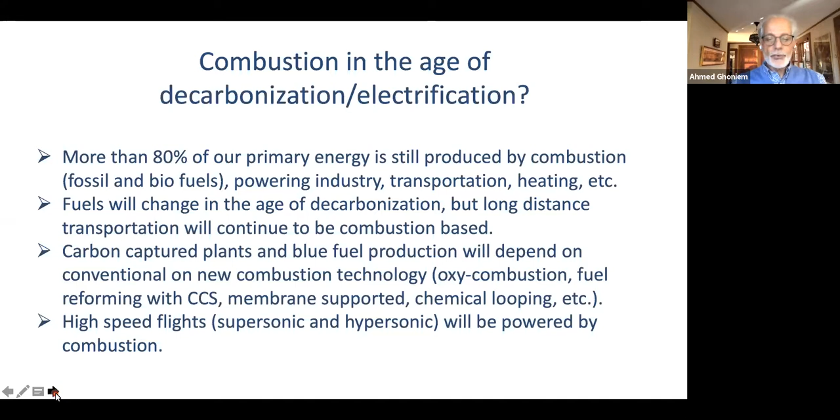For instance, long distance transportation is likely to continue to rely on fuels, probably biofuels, hydrogen, or other alternative fuels. It's very likely that carbon capture and storage, as it comes online, will continue to use some form of combustion processes, maybe oxy-combustion, maybe more traditional forms with post-combustion CO2 capture, so that will continue to require combustion technology in some form. And of course, any form of flight is very unlikely, especially long distance, to continue to be anything but combustion-based technology.

With regard to technology, combustion technology is very old, depending on where you start—fire, all the way to burning supercritical fuels, which is very recent. Obviously, it adopted and changed with time to address technologies, for instance, high efficiency, high exergy efficiency in particular for power systems or propulsion systems, and for reducing emissions, in particular NOx.

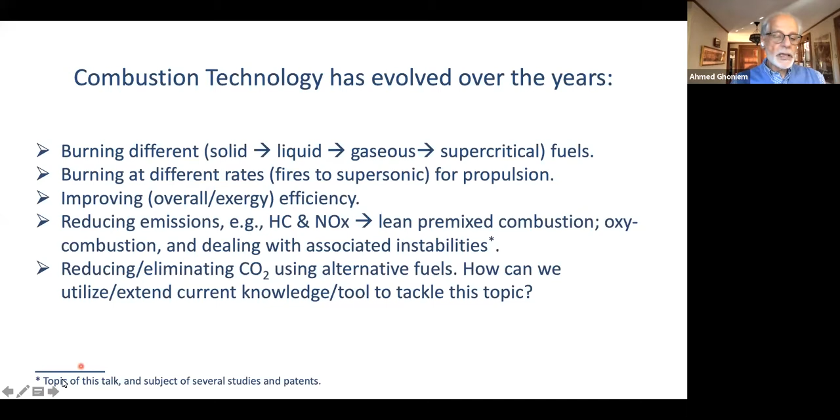The problem of combustion dynamics I'm talking about today became very prominent when technology started to move towards low-NOx technology, also known as lean premixed combustion. It continues to arise in many applications, as we will see, and continues to demand solutions, as we will try to highlight today. With progress in combustion technology, there has obviously been parallel progress in combustion science.

Depending on how you count, over the past 50 years or so there has been very significant progress in three areas that fed into our better understanding and prediction of combustion phenomena: analytical tools, primarily asymptotic methods for multiscale phenomena which are ubiquitous in this field; laser diagnostics, optical diagnostics in many forms which allow us to examine microscale phenomena with high spatial and temporal resolution; but first and foremost, computation.

When you attempt to integrate Navier-Stokes equations with reactive flows that have complex, stiff chemistry at different resolutions, you must rely on high performance computing in different forms. As time went on, many tools that evolved in computational science were brought into combustion science to help us learn more about what we are observing.

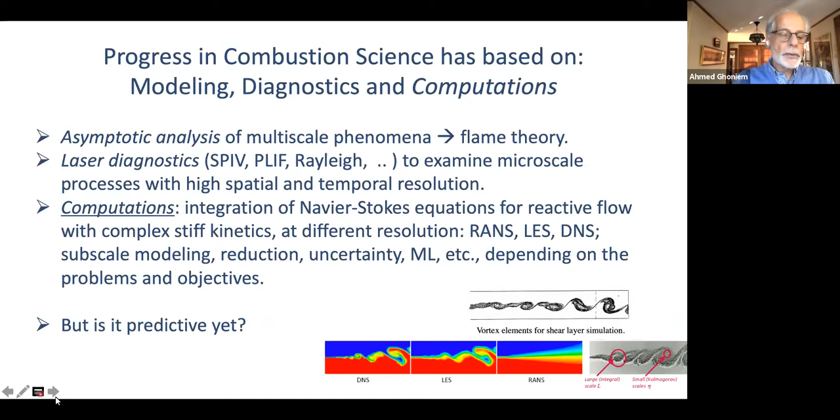One question we're always asking is: are we predictive yet? I'm going to try to shed some light on that question as we move on.

For a complex phenomenon like combustion dynamics, which we will describe in a second, we need very high resolution computing, but we also need to validate these results. We need to see the origin of the data from high resolution experiments, and we need theoretical tools and models to help explain what we're seeing in the computation and the data. I call that throwing the kitchen sink at it - if you have a complex problem, any tool you have you can put in the mix to help you understand it. That's what I'll be trying to do today.

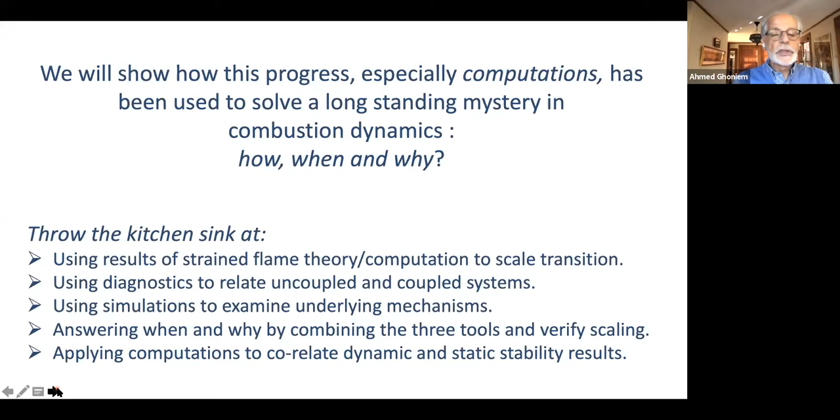We will show some experimental data with very high resolution diagnostics. We'll review some theoretical results from flame theory, in particular strained flame theory. Then we'll look at computation, try to use tools to explain the data in the computation, and circle back to attempting to close the loop by thinking about a predictive model that can be used practically to solve these problems.

Now, I chose to talk about dynamics. I chose to work during a good part of my career on dynamics for a number of reasons. Primarily because dynamics always arises in interesting problems and comes with significant juicy stuff in it that you want to dig into. It's likely to be in phenomena that cover many decades of scale.

In combustion, we like to think that we deal with about 10 decades of scales in time, and about a 10 to the power 6 time scale ratio, and about 10 to the power 5 length scale ratio.

Typically, these phenomena go through transitions, and transitions are sometimes abrupt, bifurcating-type transitions that can lead to instability and dynamics. That indeed is the case in these problems of lean premixed combustion.

When you try to reduce the fuel concentration in the reactive stream, you go through these transitions from stable to unstable systems. You do reduce NOx, but you have to deal with very high amplitude pressure oscillations.

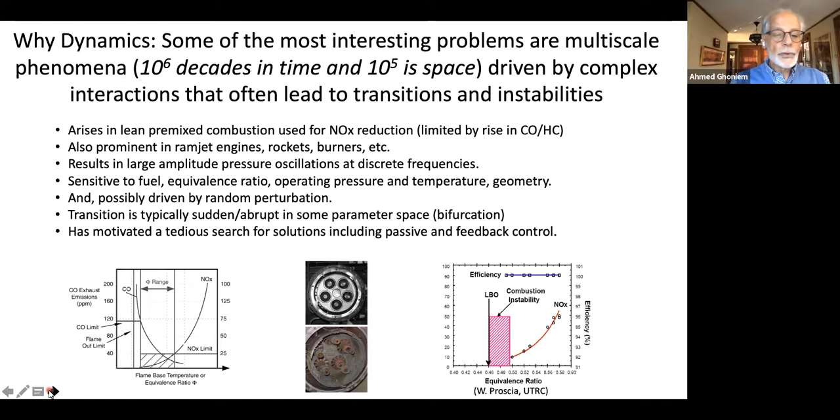It has given many of us long careers of research, and I have to say it's still ongoing, although we're hoping that what we have seen lately, and what I'm describing today, will help put it in a different place than it was before.

So now let me give you a couple of pictorial images of what combustion dynamics are. This is what we call a step-stabilized combustor, where you introduce reactive flow from the top. You have a step here to create recirculation gases to help ignite the flame. As you ignite the flame, you see that faded white - this is basically observation using a simple camera. The flame is a lazy flame running around.

As you change the condition by increasing the fuel concentration in the stream, things change drastically. You start seeing the flame running back and forth between the inlet section above the step to the downstream. You also observe that the pressure oscillations increase by an order of magnitude as we go through this.

As you start looking with advanced diagnostics like PIV systems and PLIF systems, which give you a velocity map and a map of the species, you start seeing that this phenomenon is indeed associated with these flames lifting off the step and moving backward, and the velocity field following it - these large wake vortices growing and reaching the size of the entire flame.

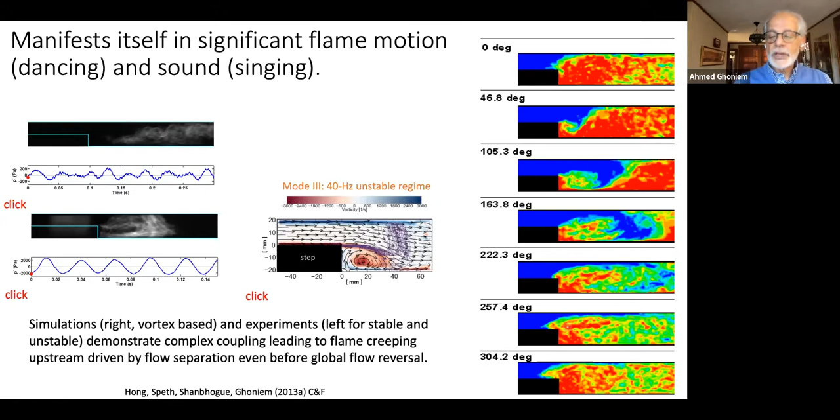That's just a manifestation of what we observe in step-stabilized combustors. Those of you who do propulsion will associate step-stabilized combustors with things like ramjet engines. This is another manifestation of the same thing: a gas turbine combustor, a swirl stabilized combustor. This is a model that we have in my lab.

When we take pictures or movies under conditions of instability, we see these flames dancing, oscillating. Had I had sound here, I would have let you hear it. Lord Rayleigh in the late 1800s, when describing these phenomena, called them flame dancing and flame singing. We do have the singing in these experiments, but unfortunately I don't have the sound you can hear on my laptop. This is a computational realization of the same thing that we will get to in a second.

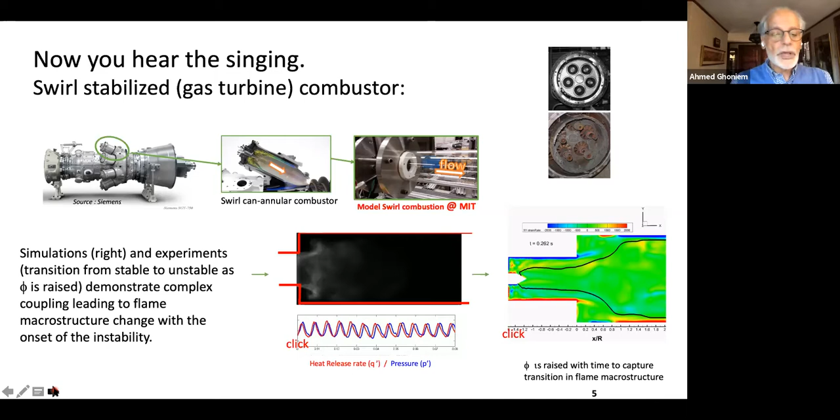Now, having seen these phenomena in the lab, as the fuel concentration or equivalence ratio increases, we started thinking of what is the underlying mechanism. Before we think about the underlying mechanism, we should mention a name I just mentioned, Rayleigh.

In 1878, Rayleigh formulated a very well-known criterion for the onset of combustion dynamics. He said that if the volume and time integral of the pressure oscillation and the heat release oscillation of the flame is positive, you should expect combustion dynamics—you should expect the flames to start to dance and sing.

He used the word condensation, greatest condensation for the high pressure. If you add heat at the high pressure in the cycle and subtract heat in the low pressure of the cycle, you should convert heat to work. That's also a Carnot principle, by the way, that you all know about from thermodynamics. So there's no surprise here.

Another way of saying the same thing: there is a resonance phenomenon that arises at some point where we have positive feedback coupling between combustion and acoustics—the combustion or heat pumps energy into the acoustic field and gives rise to the sound. What has baffled us all is the mechanism by which the acoustic perturbations can

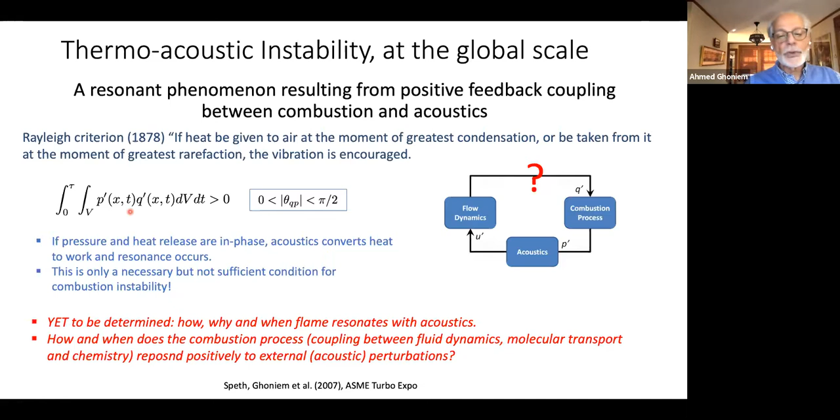comes from. Moving on, we started thinking of throwing the kitchen sink at this. We started looking at experiments with very detailed diagnostics, PIV in the plane, and PLIF that highlights intermediates in the flame like OH radicals, and very detailed simulations, whether LES type or direct simulation, as we will show later in particular special cases.

We did this because we wanted to determine not only mechanistically what's going on, but also to see whether we can define some scaling parameters for the conditions under which we can expect combustion dynamics to occur. That was really a novelty in the business—nobody had ever thought before that you should be able to scale conditions, relating transition from stable to unstable systems as some controlling parameters reach certain values.

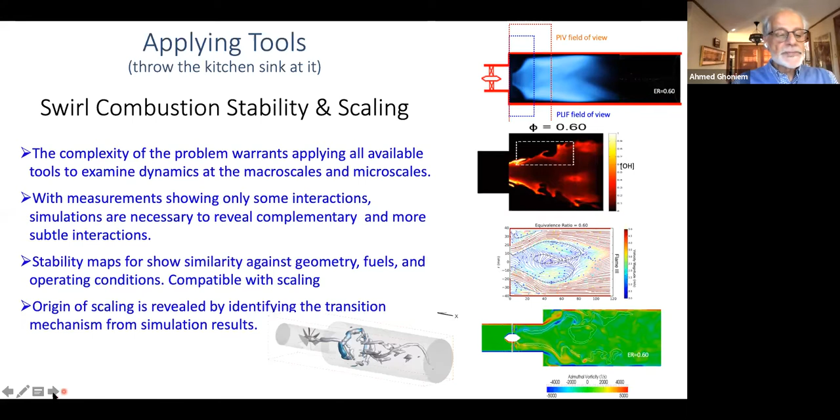So part of the reason we wanted to do this extensive study is because we wanted to be quantitative in terms of the scaling, but also to study the problem mechanistically. In this swirl stabilized combustor, when we run it, we see that as we change the equivalence ratio—the amount of fuel in the system—and stop any coupling between the flow and the acoustics, which can be done by making the combustor short so the acoustic field does not couple with the combustion process.

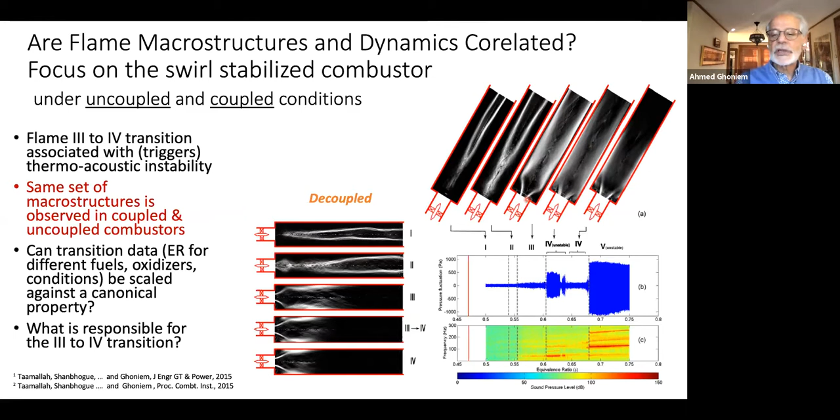So the two questions we asked were: one, can we scale the conditions at which this transition happens to some fundamental combustion property? Second, can we explain the mechanism by which this transition happens, if this transition is what controls the combustion dynamics?

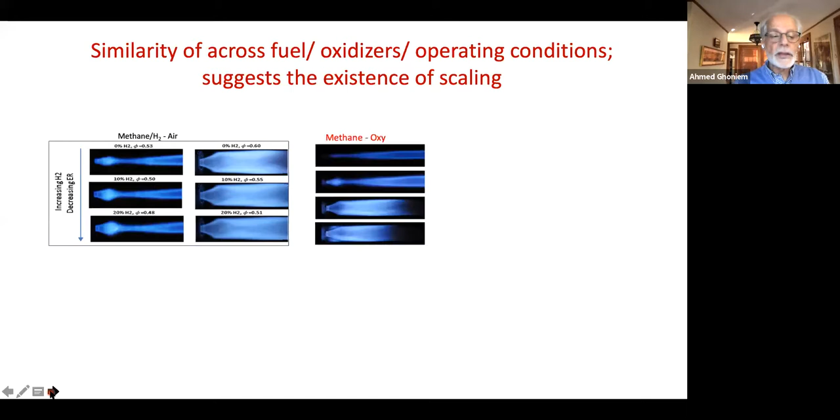The answer to the first question had to go through many experiments where we vary the fuel, which controls the flame properties, and vary the inlet temperature and the oxidizer. We look at these transition states and quantify the equivalence ratio at which the transition happens between flame 3 and flame 4, shown here in blue, and document this in a way that allows us to predict whether there is a scaling criterion. Where would the scaling come from?

The scaling would likely come from the fact that the flames sitting inside this macrostructure, at a fundamental level, behave like laminar flames, or what we call strained laminar flames. Laminar flames play a very important role in combustion theory because they are canonical phenomena whose properties are strongly tied to the governing processes, the coupling between physics and chemistry.

You can describe laminar flame propagation using the convection-conduction-reaction equation with three boundary conditions, second order. That means the flame burning velocity, this S value, is really an eigenvalue of that system.

But as you put the flame in a flow, the flow starts to strain it. The flame aligns itself with directions of high strain, and the flow strains it further. This means the structure of the flame changes, because you're changing the convective-diffusive balance within that structure. As the flame structure changes, the burning speed changes, and if you strain it too much, the flame extinguishes—it goes out.

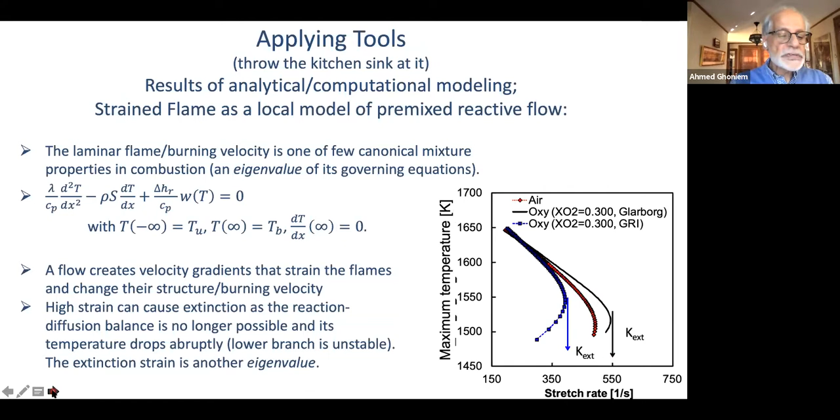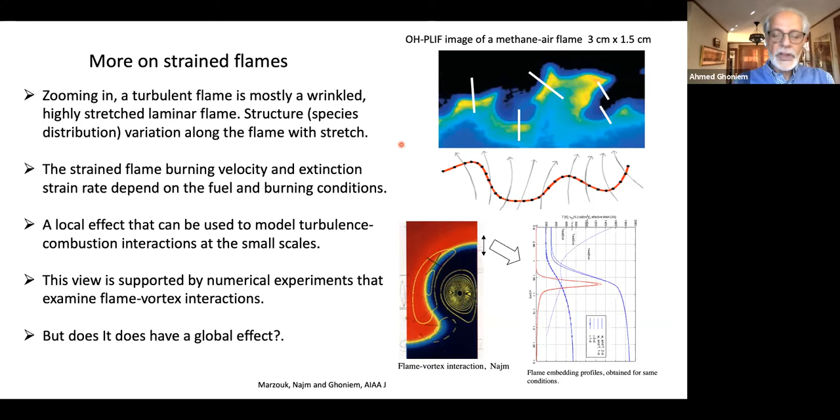The extinction phenomena happen as turbulence, or the flow, becomes strong enough that the balance between heat production in the reaction zone and heat being taken away is no longer possible. We did a lot of studies to validate this concept of interaction between flame and flow, and it became one of our primary tools. Any good flame code with detailed chemistry and multi-component diffusion should be able to quantitatively give you the response of the flame to strain, both in terms of changing the burning rate and the value at which the flame will extinguish.

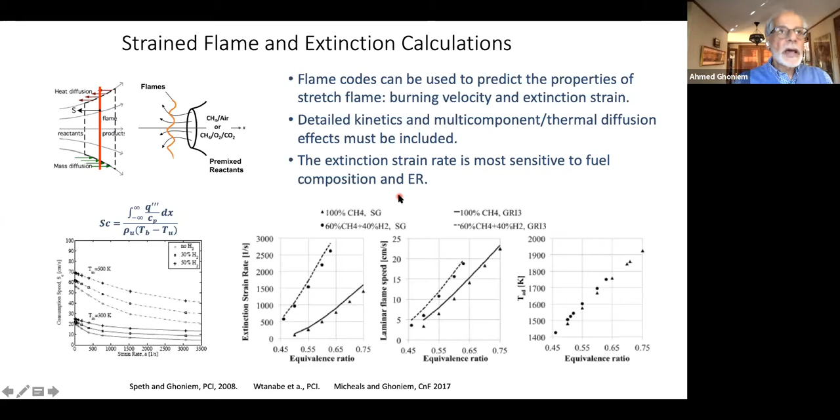What you will find is that the value at which the flame extinguishes is definitely a function of the equivalence ratio, but it's a strong function of the composition of the fuel, and the oxidizer if you're using a different oxidizer for the same process.

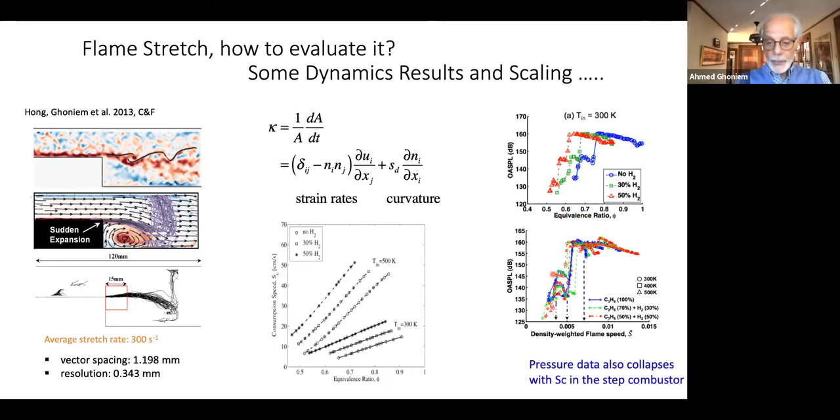So with that, we went back to the experiment and started calculating the strain that the flames are subjected to by taking the PIV result and measuring the strain, substituting in this expression, calculating either extinction strain rate or consumption speed. That allowed us to scale these results, obtained for different fuel compositions, into what looks like one single result, where we can quantify the transition by either the extinction strain rate or the consumption speed, instead of by the equivalence ratio, which varies between fuels.

We did the same thing for the swirl-stabilized combustor, and we had the same result: data obtained for different fuels could be collapsed onto one curve if we use strained flame consumption speed, or extinction strain, to collapse the data. That was a very nice result from the experiment, showing that we can scale the data to an extinction strain rate instead of the fuel type, equivalence ratio, or operating condition.

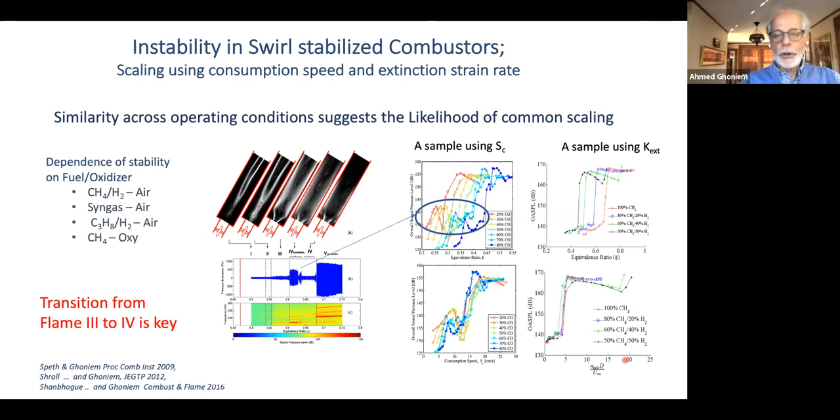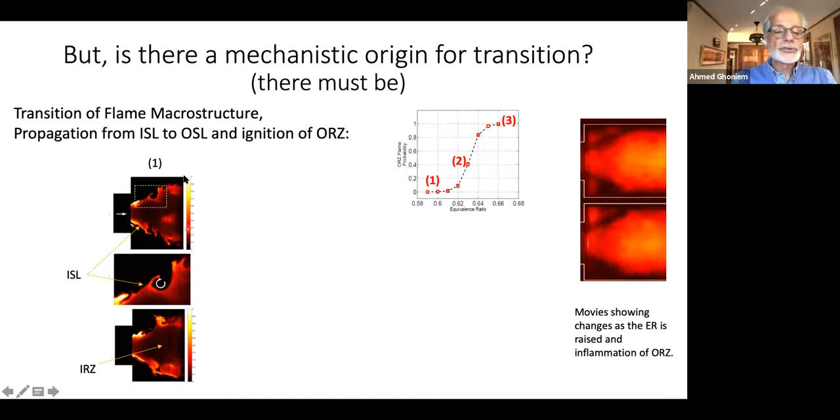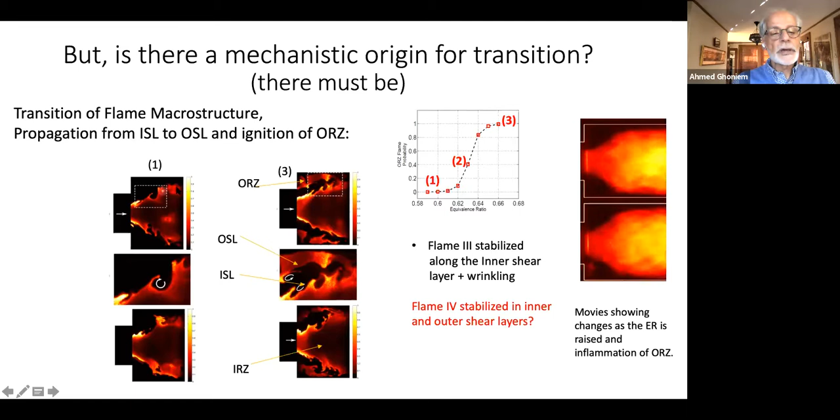That wasn't good enough, because we also wanted to understand the mechanism. So the experiment was run to follow the change in flame structure from conditions of stable behavior to conditions of unstable behavior. The unstable behavior is shown here, where the flame is sitting not only on the inner shear layer, but also on the outer shear layer.

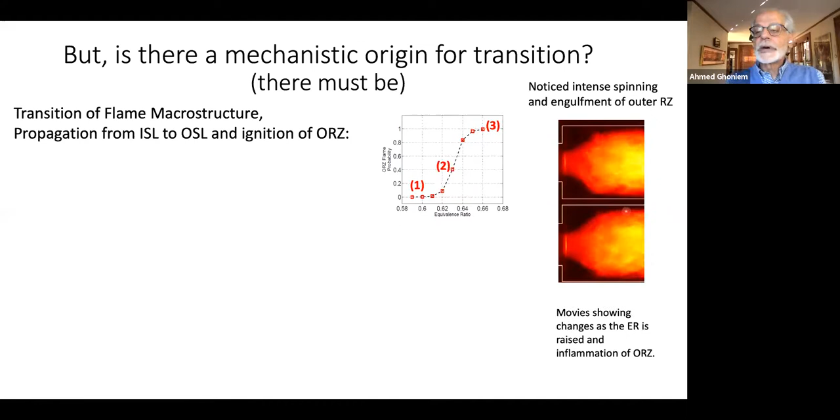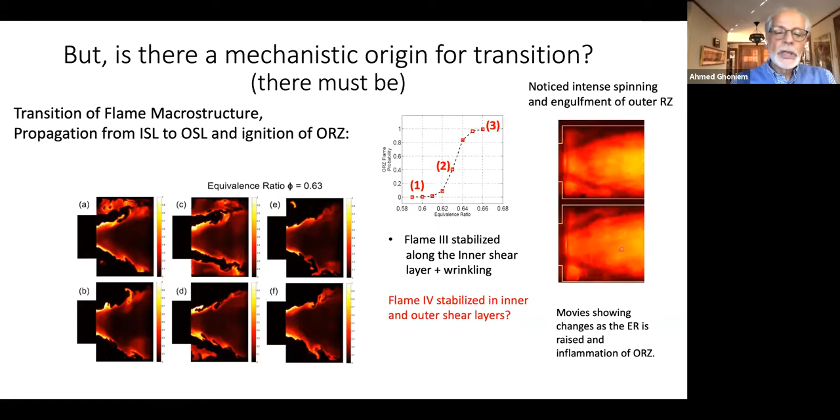If you stare at the movie for a while, you'll see it starts by burning only inside, but then all of a sudden the whole thing gets inflamed and you burn inside and outside. So mechanistically, the transition between flame 3 and 4 seems to happen as conditions allow the flame to burn not only the inner shear layer but also the outer shear layer, while it's spinning like mad because of the swirling flow and vortex breakdown inside the core of the combustor.

All of this was good as observation, both for the transition and for the scaling. That required a closer look to understand mechanistically why the flame would want to jump from the inner shear layer to the outer shear layer at some equivalence ratio, why this happens for different fuels at different extinction strain rates, and why the extinction strain rate is an important parameter for scaling. All these whys, we attempted to answer.

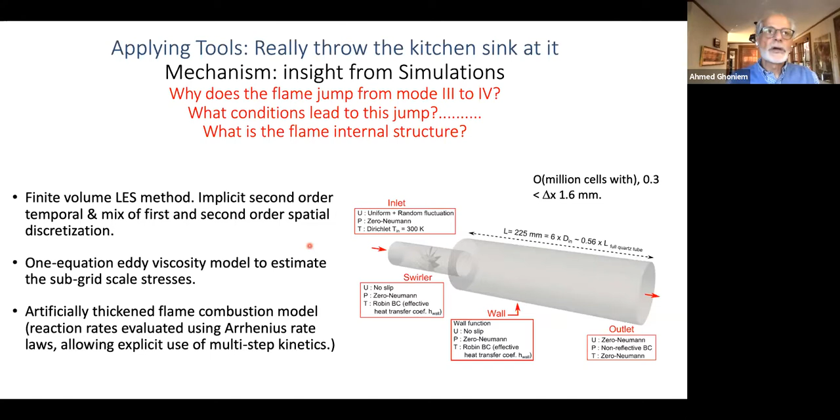We attempted to answer them by doing a large-scale calculation for the exact same problem using basically an LES finite volume code. I can talk about the detail of the code later. The important thing to keep in mind is we're trying to resolve as many scales as possible, and we're trying to resolve some detail of the chemistry in the process.

First thing we did is compare the experimental results with the simulation results. Indeed, we saw everything we saw in the experiment: an inner recirculation zone, vortex breakdown, an outer recirculation zone at the step, a jet in between, and two shear layers. We also saw that as we change the equivalence ratio from lower to higher values, the flame moved from being a long flame, what we call flame 3, extending downstream, into a short compact flame burning both in the inner and outer shear layer.

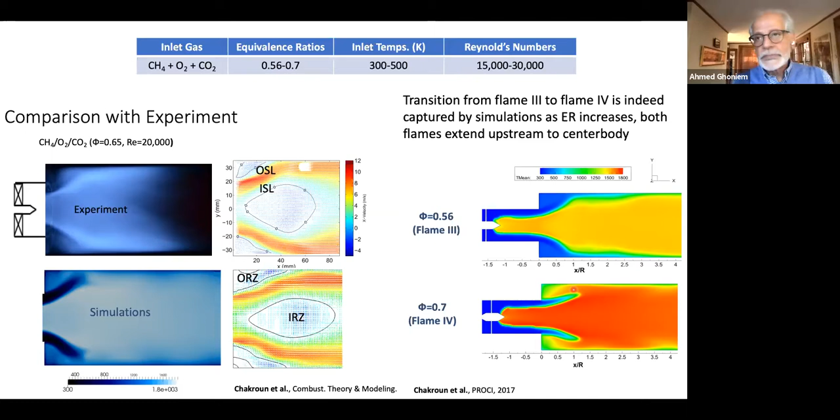So the simulation is able to tell us things very similar to what we saw in the experiment as we change the condition.

The experiment showed us that the spinning plays a very important role in determining how the flame is stabilized, and how and when it jumps from one side to the other. So we started looking at the data, analyzing the vorticity field underlying the data using by-now classical tools for doing this.

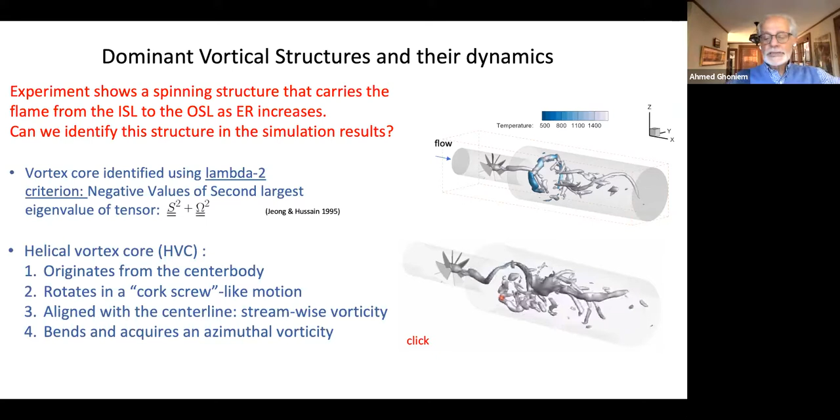We found a helical vortex core that initiates at the center body where the swirl vanes are sitting, moves in, expands in the outer channel where the flame is stabilized, and spins like a corkscrew, literally touching the outer walls as it goes into the outer expanded channel.

Now, this is for the vorticity field. So what now happens to the flame field? Here's a close-up of what's going on. Here is the corkscrew vortex, here is the flame highlighted by a reaction zone contour, and here is the corkscrew vortex starting at the center body.

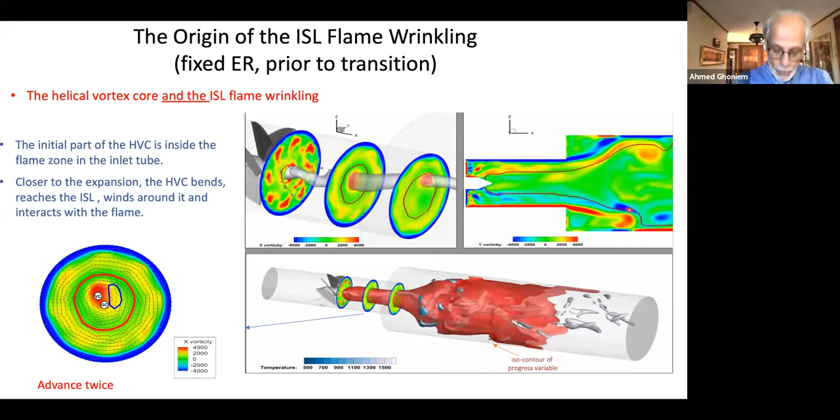Here you see where the flame is sort of hugging these inner shear layers before transition. So we're starting to see things that remind us of what we saw in the experiment, but this also gives us better clues on what is potentially going on as we analyze the data more.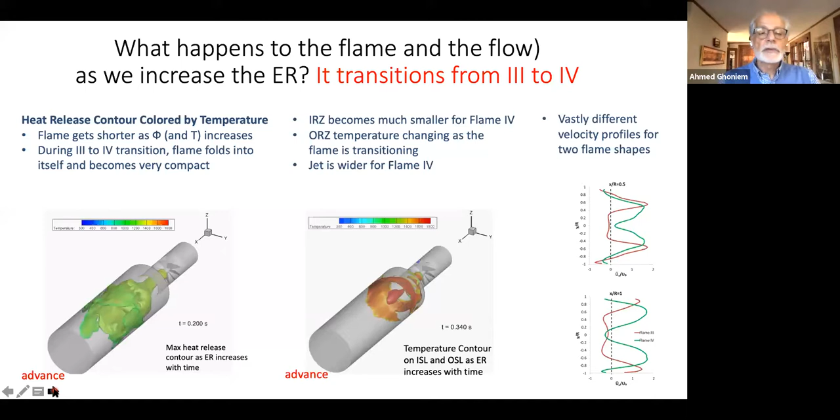At some point, you'll start to see the blue zone turning red because it's becoming inflamed. And here it is - the inner zone becomes small, and you have burning in both the inner zone and outer zone. These are very similar results to what we saw in the experiment. That's all very good - it's not explaining in detail what's going on, but it tells us we're on the right track in terms of capturing the data we need.

To look at some quantitative data, we now look at both the XY plane and the YZ or RZ plane to see what happens to the demarcation line between the fuel and the product - fuel being red, product being blue - as we increase the equivalence ratio. You see something is happening here. Here it is.

At some point, the flame touches that outer recirculation zone, or outer shear layer, and starts to engulf it. That's really a key point in what we learn from the result. At some point, the flame is able to inflame the outer recirculation zone. So instead of being pure fuel, all of a sudden you see the fuel starting to disappear - it becomes blue and the flame jumps with the spinning. Here's the spinning action, engulfing the outer recirculation zone.

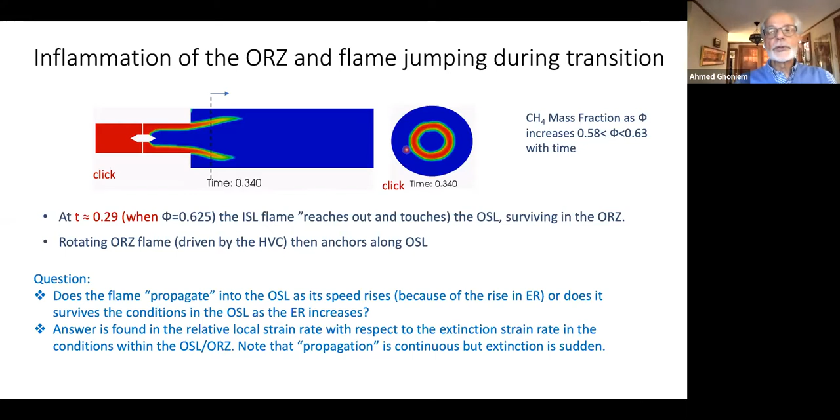So the question we ask here is: did the flame propagate into this zone, or did something else happen that allowed it to exist in the outer zone where it couldn't exist before? In order to answer this question, we had to do a bit more diagnostics. So here is the geometry we have.

Here is the flame contour, a contour that represents what the flame looks like. I'm going to start the movie here. You'll see it's running, and we're also gradually increasing the equivalence ratio. Nothing happens, nothing happens, nothing happens, until some point - you'll start to see that engulfment and the flame moving from just the inner shear layer to also the outer shear layer.

That point is associated with - if I advance here - flames becoming stronger and stronger such that they can survive the extinction strain rates in the outer recirculation zone. When we plot the ratio between the local strain rate and the extinction strain rate, we see it decreasing as we increase the equivalence ratio, up to the point where you get the transition. Right at that transition, you see the flame going from the inner shear layer into the outer shear layer, engulfing it and producing that new flame we also saw in the experiment: compact, V-shaped, closer to the step.

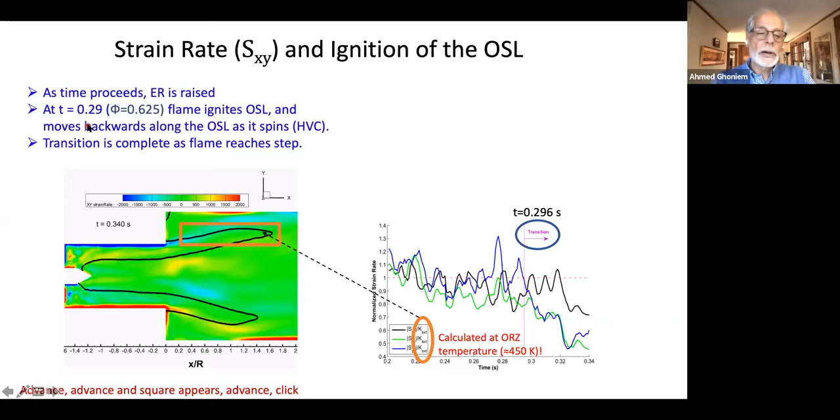So the bottom line we get from here is that the local strain history in the outer recirculation zone is key to predicting when the transition will happen. And the transition happens not because the flame is propagating faster - it's because it's getting strong enough that it can survive in places where the strain rates are high. That certainly explains why strain rate was a good parameter for scaling the data.

And now I'll show you what I think, from a practical point of view - if I were a practitioner in this field - would be the most important result of this work.

How do I put all of this together in a performance curve, and say to the combustion engineers: if you design your combustor so that you are in flame 3, the combustor is stable. If it jumps to flame 4, it will go unstable.

In order to do this, we need to plot a diagram from what we call a flame time scale, which is 1 over the extinction strain rate, and a flow time scale. To determine the flow time scale, we need to go back to what we learned from the data and simulation: that the flow time scale is associated with the spinning shear layer or spinning helical vortex that carried the flame from the inner zone to the outer zone.

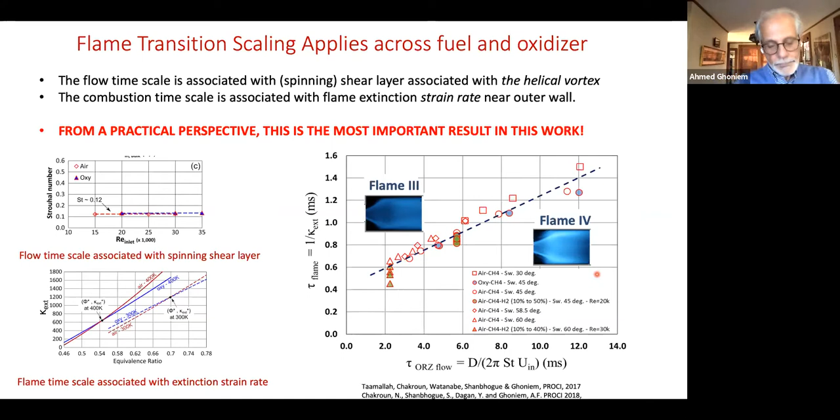So this, to me, is the culmination of all that understanding, and a kind of tool that you can give to a designer to make sure that whatever they're designing will be a stable operating system. So this is a good result.

Technically, or from the engineering science point of view, we also wanted to make sure that indeed that extinction strain rate quantity, or these underlying flame structures, is what determines whether the overall combustor is globally stable or not. So we did a bit more analysis.

We looked at the internal flame structure from the simulation data and plotted on a phase plane the flame structure, for instance the concentration of fuel versus temperature, for flame 3 and flame 4, and indeed they look very different. One of them has burning in one shear layer, while the other burning is extinguished because of heat loss and interaction with the wall that prevented it from burning in the outer layer. The other one, flame 4, is much more compact and robust, with all the burning happening within the narrow structure expected for a laminar flame.

Again, why this is important: all of this explains why relying on the 1D strained flame to try to predict the global behavior of the combustor made sense and gave us good scaling.

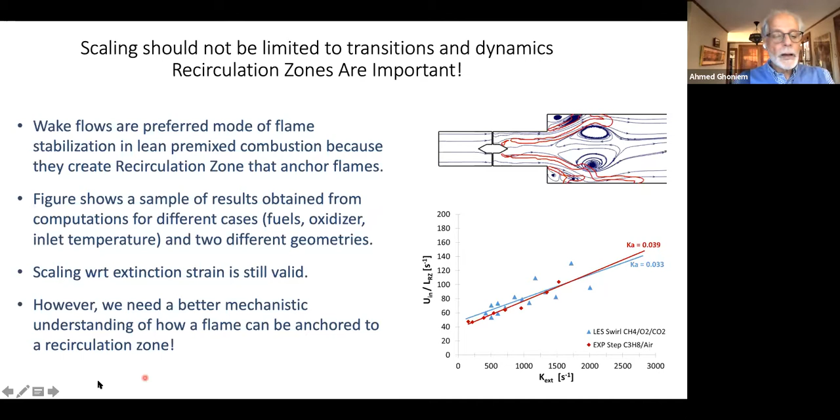Having seen all of this in a turbulent flow environment, both in calculation and experiment, made us think we wanted to be more certain whether these observations were due to, for instance, the simulation itself—whether any kind of turbulence modeling or turbulent combustion modeling input had much to do with the results we were observing.

So we decided to apply the same kind of analysis, not to combustion dynamics this time, but to multi-dimensional laminar flame results. We went back to a code developed in my group over the years for laminar, multi-dimensional flame calculations, stabilized over any kind of flame holder you can think of.

These are laminar flame calculations, so they're direct simulations with detailed chemistry—state-of-the-art detailed oxidation chemistry, for instance of methane. But because of the multi-scale complexity, they also have adaptive mesh refinement and multi-scale projection immersed boundary methods, because we wanted to couple the heat transfer within the gas phase flow to the heat transfer within the flame holder.

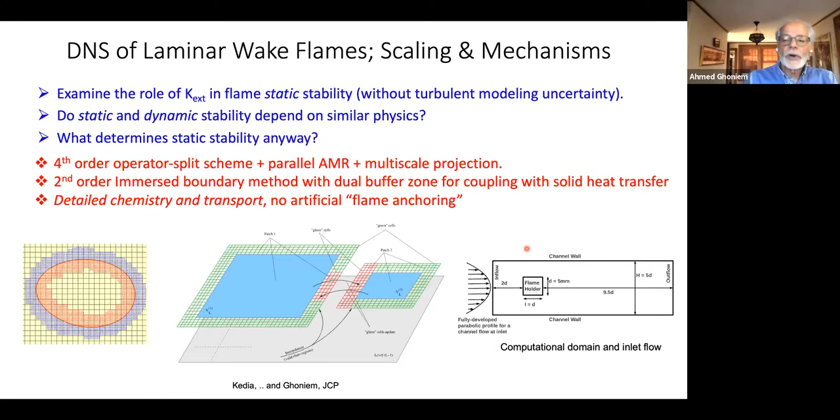That turned out to be a very important part of what we saw later. So having put together this code, we ran it for different equivalence ratios to see how flames behave under laminar conditions as you change the equivalence ratio.

What happens is the recirculation zone associated with the flow changes its size. There's a volumetric expansion that expands the flow. And of course, the flames start to react differently to the recirculation zone as you change the equivalence ratio.

The flame is stable. It's anchored, sitting here. In the lingo of the combustion field, these stable flames have what's known as static stability. They survive the flow, and will blow out eventually if you decrease the equivalence ratio, but they survive the flow. One question we wanted to know is, why do they survive and how do they survive the flow?

If you zoom in here, you see that the flame is not really sitting on the bluff body, the obstruction that we're putting in the flow. It's sitting off it. One question we wanted to answer is, why is it sitting off that, and how far should it be?

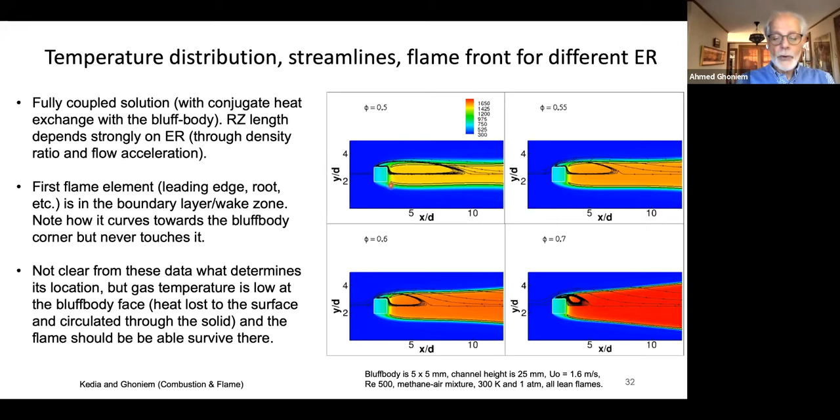And whether these concepts of scaling that we discovered before in the turbulent flame case apply here. So we did things like scale the length of the recirculation zone, attempting to scale it versus different input parameters, or versus the extinction strain rate calculated for these flames. Indeed, the extinction strain rate was able to scale this data very beautifully.

That supported the idea we found in the turbulent case, that the flame response to flow, as embodied in the extinction strain rate, is an important canonical property. Where does the flame sit with respect to the anchoring body? This changes as you change the condition, as you see here, and has always been a mystery.

Why does it sit here? Why doesn't it sit anywhere else? Remember that the body takes away some of the heat that's deposited by the flame here. There's coupling between the gas and the solid.

That required diving a bit deeper into the thermochemistry of the problem, looking at the actual distribution of fuels inside the recirculation zone. Turns out that a fuel like methane, when subjected to heat by combustion, pyrolyzes, breaks down. And it breaks down into things like hydrogen and CO, which have different diffusivity.

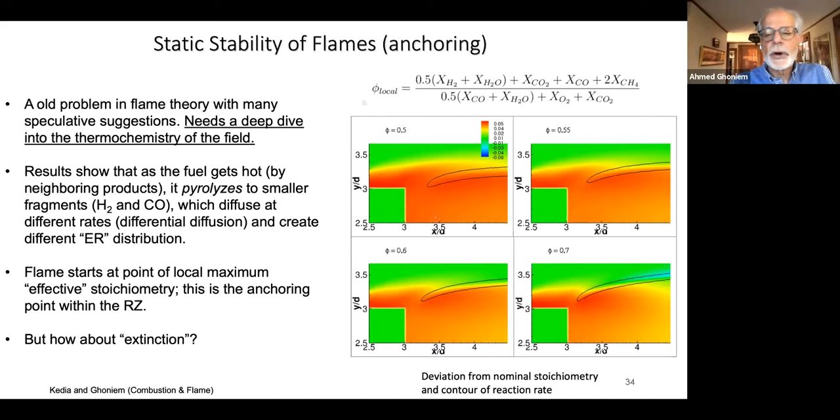As they start to interdiffuse within the recirculation zone, they create different local equivalence ratios than the nominal equivalence ratio of the flow. The flame finds the point where the local, effective equivalence ratio is maximum, and it starts there. That was another nice discovery that told us something about where we should expect the flame to start, the tail end of it to be.

The idea that the extinction strain rate is important was also borne out by looking deeper into these results, looking at the flame, shown here by the dotted line, looking at the strain along that flame, and looking at the local burning velocity or burning rate along that flame. You see this strain dropping very quickly from the point of very strong shear, very strong flow here, to a much lower value downstream.

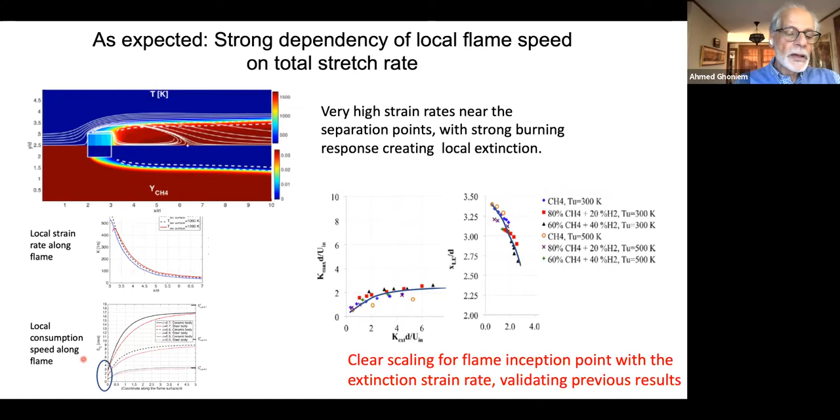We also see that the burning velocity is dropping almost precipitously in response to that strain as you get closer to the bluff body, nearly extinguishing at the end of the flame, at the root of the flame, very close to the bluff body. So again, this supported the idea that these reacting flows really respond very readily to these interactions that make flames either survive or die out.

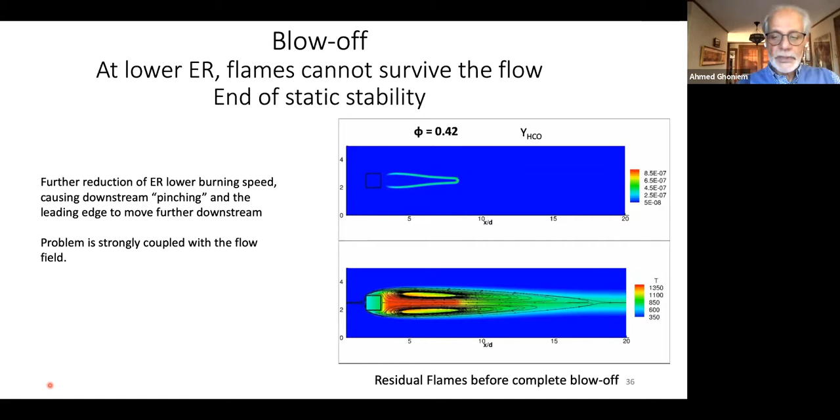At some point, as you reduce the equivalence ratio to a very low value, you go into what's known as the blow-off condition, when burning is no longer possible and the flame falls on itself and disappears. That was, again, a bit of a demonstration of how we go to the limit of all these effects piling up, leading to the disappearance of flames.

Now, I showed you some calculation and experiment in the turbulent flow regime, and a lot of calculation in the laminar flow regime, that allowed us to be a bit more rigorous in terms of both the modeling of the physics and chemistry of the problem, as well as the computation.

And we learned from the computation in the laminar case that the response of the flame to conditions very close to the anchoring point are important, and are really determined by the fact that near the anchoring point, the fuel is subjected to heating before it mixes sufficiently with oxygen, and that leads to pyrolysis, leads to breakdown of the fuel, and leads to different behavior of this local zone than the well-established zone downstream. So we went back to the LES codes and expanded one of them to add very detailed chemistry, because pyrolysis is important.

In fact, this calculation turned out to be one of the most expensive calculations we've ever done, because we had to put something like a GRI very detailed chemical mechanism into an LES code. The bottom line is, even under turbulent conditions, you get significant pyrolysis or breakdown of the fuel at the early stages of the burning process, which determines the dynamics or mechanics of flame anchoring, or flame static stability, near the anchoring point.

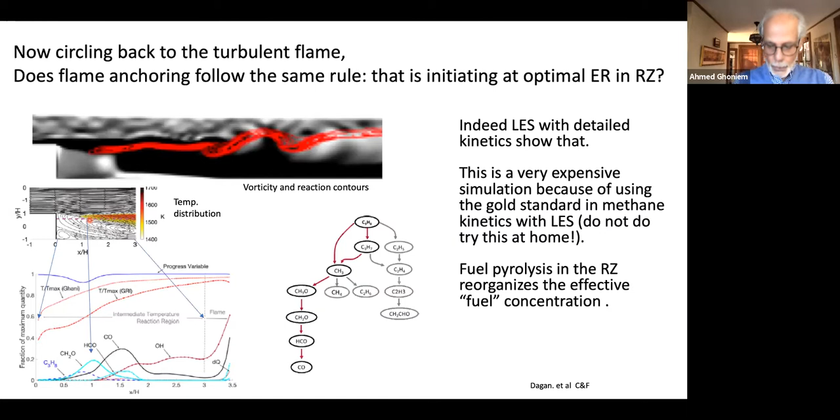So with that, I'd like to wrap up and give some time for questions. My conclusions are summarized in these two slides.

One is, if you have complex problems like dynamics with multiscale, with transition, with very strong coupling, and you want to break it down and reassemble, if you like, the underlying mechanisms, you should throw the kitchen sink at it: experiments, very detailed, with very accurate diagnostics at the microscale, computing as much as you can afford, as well as modeling that allows us to look at the data, whether from experiment or simulation, and relate it mechanistically to the physics and chemistry underlying these problems.

What we found in this experiment is that the coupling happens as the flame structure itself transitions, as the equivalence ratio changes. We found that we can scale that transition point, for any mixture we tried, to the extinction strain rate, which is a canonical combustion property of the fuel under the conditions you're using it. These transitions occur as the flame structure changes, as it jumps from the inner shear layer to the outer shear layer in this flow, and this jump occurs because the flame becomes strong enough at some point that it can burn not only at the inner shear layer, but the outer shear layer.

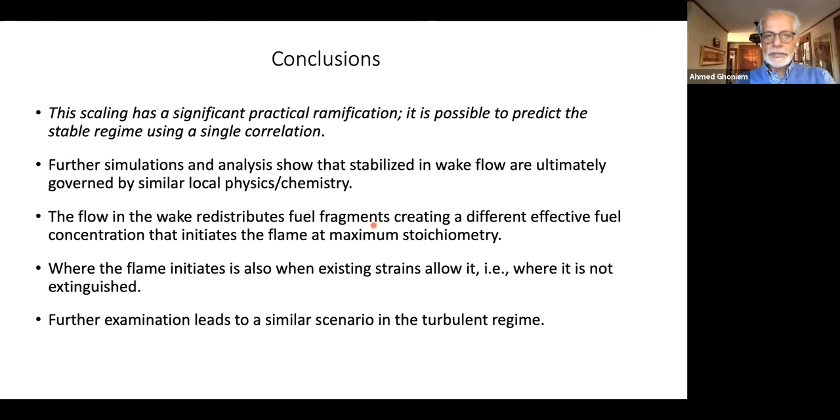Ultimately, all of this knowledge is not just about mechanistically understanding what's going on scientifically, but also about where we can feed this data into being able to design cleaner burning systems that are also stable. So with that, I'll wrap up and finish, and open the floor for questions.

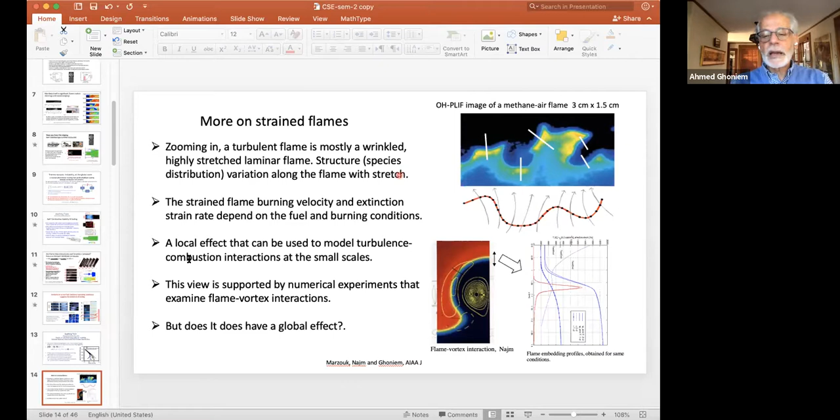The reason why we believe in many of these applications that the underlying laminar flame should be able to tell us something about the behavior of turbulent flame is things like these. Looking at the microstructure of a turbulent flame, you see basically a flame wrapping around turbulent structure. This is our own data.

Looking at PLIF images that highlight OH, which is a radical that always appears in this problem, again you see a flame structure that is very much like a line wrapping around a whole bunch of eddies. Under these conditions, it's not at all unreasonable to approximate what's going on here as a laminar-like flame that is simply being wrapped around, strained, and curved and torn apart by turbulent eddies.

Of course, as you increase the turbulence intensity more and more, you probably will get to a place where that no longer is possible. As you go to extreme Reynolds numbers, where turbulence intensities are so much higher than the flame can survive, it will no longer survive, it will break up. There's another model in combustion theory called the well-stirred reactor that was developed to try to describe this.

Now, under what condition in practice can these things be found? Not too many. It's very difficult to get to a place where you have such intense turbulence that you totally break down the flame structure and tear it up into something like a well-stirred reactor. It could happen - I'm not totally ruling it out - but within the range of conditions where you don't tear up the flame structure completely, break it down into small bits and pieces of reactant and products running around, using a laminar flame, strained laminar flame, to describe the underlying interaction between flow and combustion seems to work well.

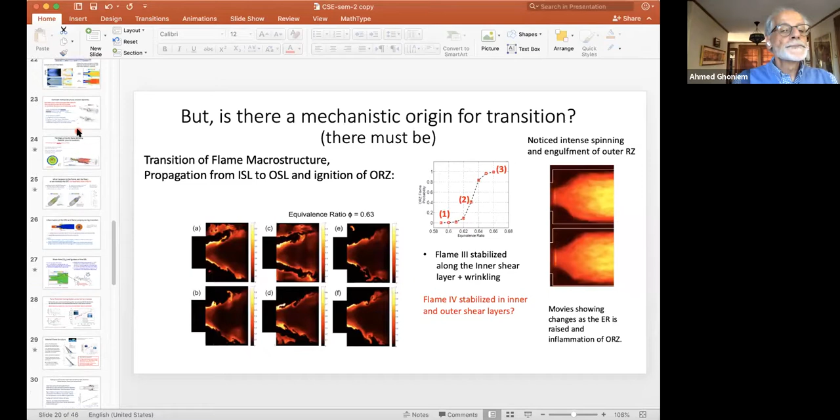What we did was use another approach to this called the embedded flame - or the exact term is artificially thickened flame, another way of describing it. This model allows you to calculate the flame structure in real time, given the condition at each cell, or at each point in your flow.

So it allows you to use any level of chemistry detail in calculating the local burning rate at each point in your flow. You can use one step or 2-3 steps, and this is cheaper because you're carrying or transporting only 2-3 species. Or if you're really ambitious and want to look at the impact of complex chemistry, you can use a very detailed chemical model - 100 or 50-60 species and whatever reaction steps you need. In this case, you're going to have to transport all of these species, so you're going from transporting 2-3 scalars to transporting 50 scalars. And that's where the scaling comes from.